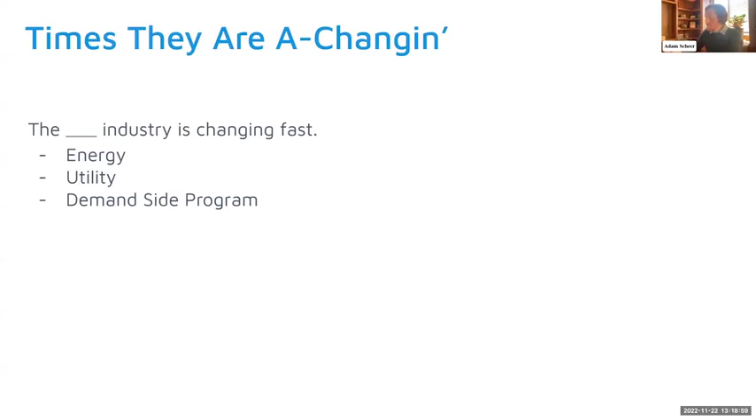Secondly, we have the opportunity where methods, advancements, and specifications can open up a new batch of use cases. Things like integrated efficiency and demand response, solar and storage. Like I said, and I think we all understand this inherently, the programs of tomorrow are not going to look like the programs of yesterday. And so, yeah, times they are changing, right? So just fill in the blank here. The industry is changing fast. The energy industry is changing fast. The utility industry is changing fast. Our industry is changing fast.

And why is it changing fast? Well, the electric grid itself is becoming the hub for broader decarbonization. It's not just decarbonizing power plants. That's not the game anymore. It's decarbonizing transportation. It's decarbonizing buildings. It's decarbonizing through the use of solar plus storage and giving the grid that much needed resilience when we have a high penetration of renewables.

So distributed energy resources in general are being utilized and integrated into the electric grid system in a way that they never were before. This obviously is creating a huge stress on the grid, and it gets back to some of my earlier statements about the need for demand side resources. So we need measurement capabilities that will enable, not inhibit, these types of modern programs and the aggregators who can bring them to bear.

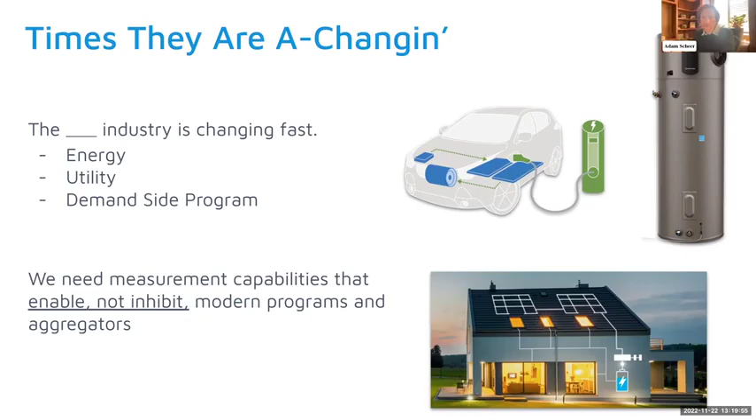Okay, let me stop there really quick and see if anybody has any comments, questions, or thoughts on what I've covered, and then I'm going to get into a quick methods review and then where we want to go at this point with some of the existing methods.

I see James. Yeah. Hi there.

Yeah, so one question, I suppose, is on whether CalTRACK is meant to calculate site level savings or portfolio level savings. It's a really good question. CalTRACK fundamentally is an individual meter model. However, it's really not designed to be that highly sophisticated, specific model for every single building out there, especially on like large commercial. So there is a lot of statistical variability in energy consumption year over year for most customers.

If you look at the residential sector as an example, the standard deviation in the difference of year over year energy consumption is almost a megawatt hour. That's like 8–10% of a typical customer's usage, even more in California. And that's just year over year energy consumption, and you can even weather normalize that, the value is about the same. We know that we have a lot of change that's happening in a typical customer's circumstances.

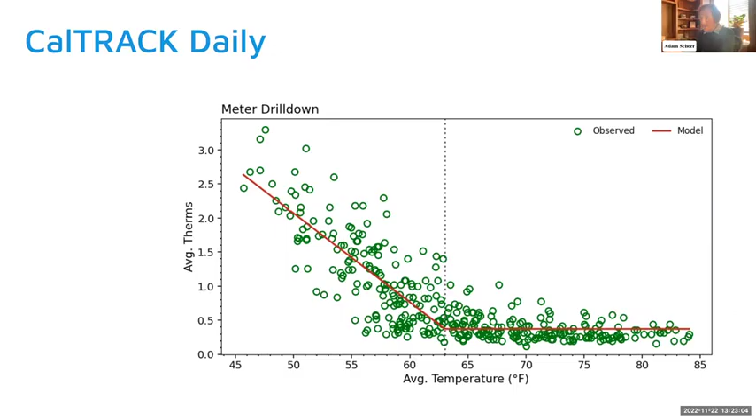So I want to start with the CalTRACK daily. The way CalTRACK daily currently works, this is just a graph that shows you how a model is overlaid on meter data. This is a good example to think about with respect to gas consumption. We have the average daily temperature on the x-axis, and on the y-axis the total therms consumption for any given day. Think of this as a meter. The model generated to fit this data has a few components, and the model is shown in the red line.

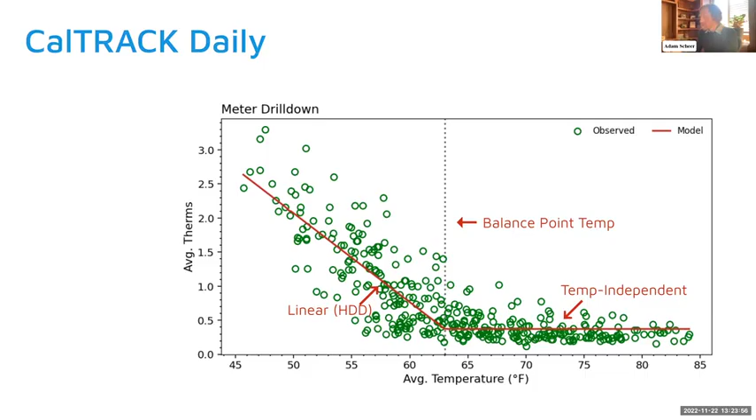First is a balance point temperature. The balance point temperature basically says where in this meter's usage do I start to see increased consumption as a function of temperature. Outside of that region is a temperature independent region. To the left of the balance point temperature, at colder temperatures, I have a linear model that we fit. So it's basically a piecewise model with a temperature independent region, a balance point temperature identified in the optimization process, and a linear region, and this HDD is a heating degree day. I'll talk more about what exactly that is. So these are the components of the CalTRACK daily model.

Now, what I showed you was an example for gas. In reality, there are 4 distinct CalTRACK models that can be fit to data, and we will fit each one and choose the best one on a meter by meter basis. These range from a completely temperature independent model all the way through to a model that has a heating balance point temperature, a cooling balance point temperature, and associated slopes. A model like that you might expect for a customer that has electric heating and electric cooling, or whose energy consumption increases in the winter as well as in the summer when the temperature gets cold and when it gets hot.

So this is fundamentally the way that the CalTRACK daily model is formulated. It's not insanely complicated, but it's not super simple either. These balance point temperatures are variable, and they're determined via an exhaustive grid search. Every single degree is tested to find out if putting the balance point temperature there, in the linear regression that follows, is the best possible point to fit the data on hand. We'll talk more about opportunities to simplify the grid search functionality, which is computationally very expensive.

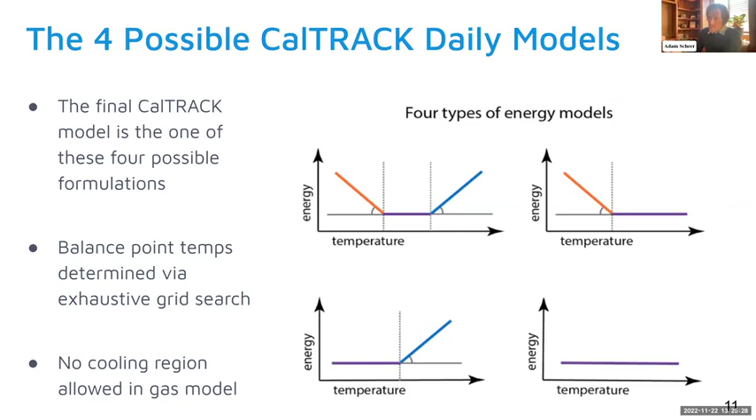Okay, now the hourly model. I'm not going to dive super deep on the hourly model. There's much more that goes on in the hourly model. For those of you who are familiar with the terminology, it's a time of week and temperature model, meaning that the model parameters or the variables are the hour of week and the outdoor temperature. It's a piecewise linear model, so there are a number of temperature bins for which data are fit independently. And so in addition to those aspects of the model, there's also an occupancy parameter, and there's this building state.

So seasonality in the CalTRACK hourly model is captured. It's not really captured in the daily model. I'm going to talk a lot more about that. But seasonality is captured by producing independent models for each month. So every single month gets an independent CalTRACK hourly model. So the time of week aspect of the model is for specific timeframes that each month is utilizing to develop a distinct model. And then all of those models are basically sutured together for the annual CalTRACK hourly model.

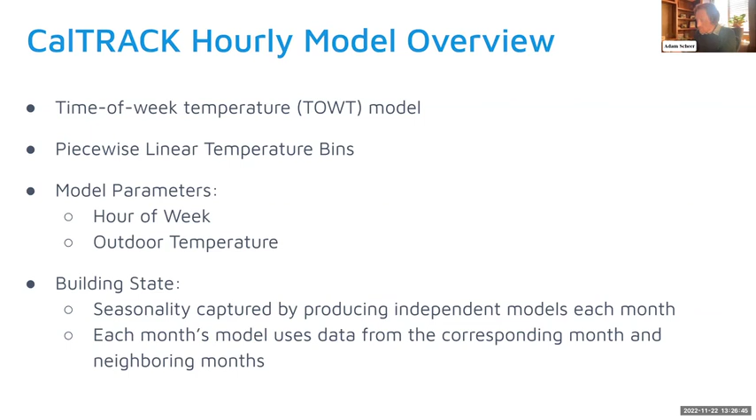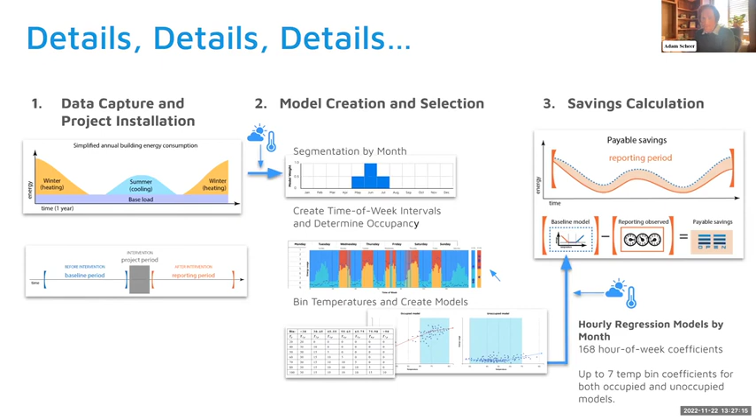So there's a lot of details that go into this. And in particular with the occupancy detection or the building state, there's an initial regression that's done. There's a lot of details around how the temperature bins are determined and what data sufficiency needs are for each of those temperature bins to avoid poorly fit models or overfit models. So there's quite a bit, and there's a lot of documentation. We have a lot of links in this deck that will point people to deep dives on any of these things if you want to look that far.

So once you have a baseline model, and that baseline model is developed on a 365-day pre-program period or pre-intervention period, then you can produce a counterfactual. And that counterfactual uses the model parameters that were optimized during the baseline period in order to predict the energy consumption in the reporting period or in the post-program intervention timeframe. And the way this is done, if you think about the daily model, the temperature is the variable in the daily model. So you take the temperature data of the reporting period and you plug it into the baseline model parameters, and that gives you a prediction of what energy would have been consumed in the absence of the program. And that is called the counterfactual.

So the difference between the actual observed consumption and the counterfactual is the savings. That's the savings in the CalTRACK model. It's not crazy complicated, really, but it's good to go over this because that counterfactual is everything. Having reasonable counterfactuals is really what makes a model a good model or a poor model.

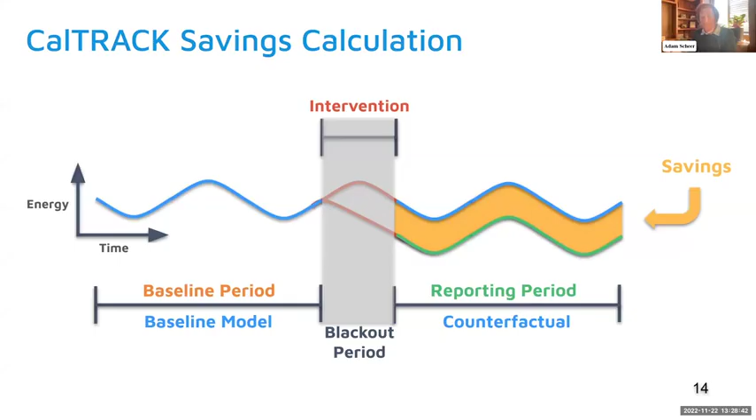Okay, so I think I'm going to go through this section, then I'll stop for questions. And then Travis Sykes, who is a lead data scientist at Recurve, is going to take the baton and talk a little bit about addressing some of the issues that we would like to bring to the forefront here today. So CalTRACK Daily, let's start with CalTRACK Daily. We know that there are specific areas of model bias. And the question we have is, can we improve the known biases in the CalTRACK Daily model? And I'll talk more about where we know these biases are.

So secondly, are computational and efficiency gains achievable? I think it goes without saying that in large portfolios, we need to have a model that can scale. We need a model that doesn't take 20 minutes to formulate and run. We need parallelization. We need these models to be able to operate on portfolios of millions of meters potentially. So computational efficiency gains would be a very welcome thing.

And potentially improve modeling for solar PV customers. This is an aspect that we're all grappling with now. More customers have solar, and we'd like to be able to include them in programs. In fact, they would be very worthy of prioritizing in our programs. They have solar. They're likely to be customers that have something to offer the grid.

CalTRACK hourly. So there are a number of known, very small bugs, and it would be good to just fix those, to knock those out. We'd also like to specify demand response baselines and appropriate model modifications. This whole hourly CalTRACK model that I talked about earlier, suturing together a lot of monthly models, doesn't necessarily lend itself immediately to the demand response use case. So we've made some progress on this already, working with the California Independent System Operator. And we'd like to bring some of those findings to this group and talk about how DR baselines can be established within the CalTRACK framework.

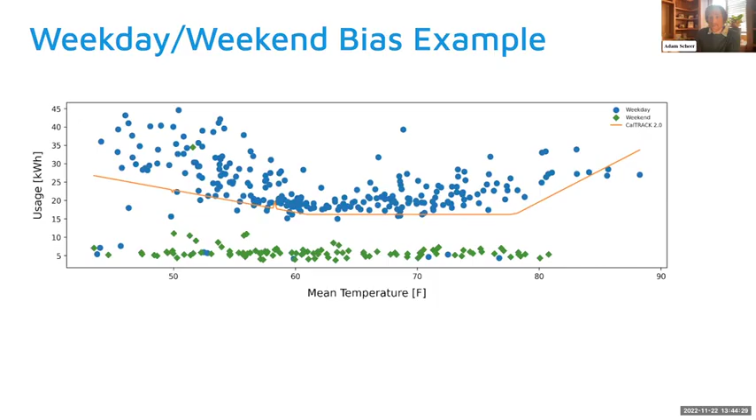Okay, seasonal bias. I'm going to spend a little time talking about seasonal bias because I think it is quite important, and you could ask yourself, why is there seasonal bias? It's one thing to know that there is seasonal bias. It's another thing to really figure out why it is there. And I'm going to try to explain why seasonal bias exists in the CalTRACK daily model. So feel free to ask questions if I'm losing folks, but I'm going to do my best to explain this as clearly as I can.

So first and foremost, I just want to explain this graph. The x-axis is the average daily temperature minus the heating balance point, and we're looking at aggregated data. The reason we're using this metric on the x-axis of average temperature minus heating balance point is it allows us to put everybody on the same apples to apples basis.

If I were just using temperature on the x-axis, well, some people have a heating balance point of 40. Some people have a heating balance point of 55. Some people have a heating balance point of 75. It changes for everybody. So if I'm looking just at temperature and I'm looking at bias as a function of temperature, then I'm mixing all of these different customers together in a way that doesn't actually highlight the problem.

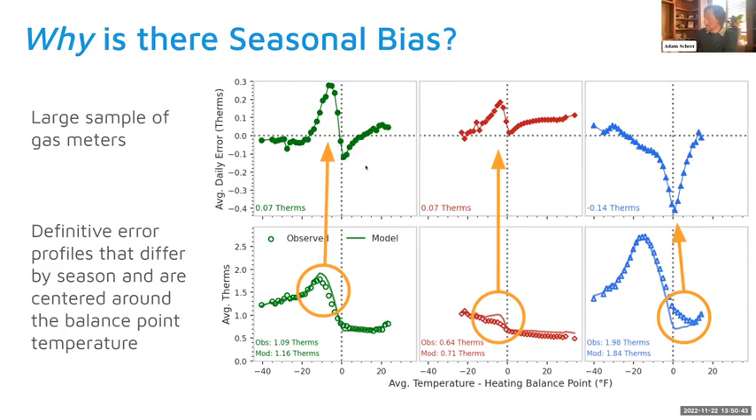Okay, that's a mouthful. I'm going to just get through the seasonal bias discussion, and then I'll stop and see if there are any immediate questions. So I've kind of explained this. I probably should have used the animations that I generated.

But it winds up coming back to about zero, which, like I keep saying, if you have an annual model, your bias around the year is going to end up around zero.

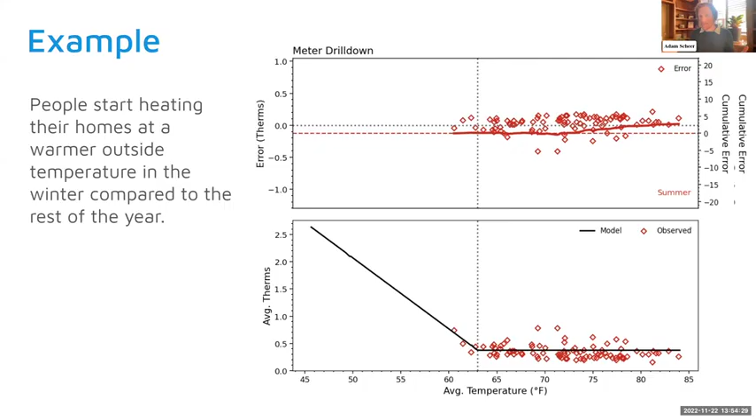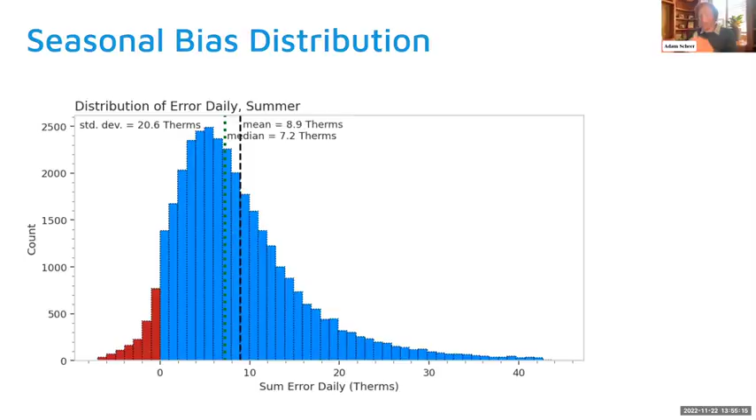It's pretty obvious, I don't need to explain this a lot. It's pretty clear that this is a pretty systematic effect. It is there for most customers. When I look at the summer, it's very different, but it is also there for most customers. And I can show the shoulder; the shoulder looks a lot like this too. So this is why there is seasonal bias in the CalTRACK daily model. Let me stop there and just see for a couple minutes, and then I want to move us on, if there are any thoughts about this.

Yeah, this is Steve again. I think we've seen this for all the homes we've analyzed, and we see that getting the balance point temperature correct is very, very difficult for many, many homes, and it changes throughout the year. So those two things are critical. So I would say that improving the method used to select the balance point temperature in CalTRACK is a key goal. Thanks, Steve. Totally agree.

All right, I'm going to move us on. This is just an interesting side note, which is we've also done this analysis for the CalTRACK hourly model, and there is a bias pattern, but seasonal bias itself tends to not exist. So if I'm looking at these numbers in the lower left-hand corner of these plots, I see that for the average customer, the average daily error is about 0.14 therms negative in the winter, and then 0.07 therms positive in both the summer and in the shoulder period.

But in the hourly model, that bias doesn't really exist across the season. But there is a pattern, interestingly enough, because the hourly model doesn't really have a balance point temperature, but I'm still plotting it against these balance point temperatures that were determined in the daily model. So there is a pattern here, which is very intriguing and something that we anticipate coming back to when we're focused on the hourly model.

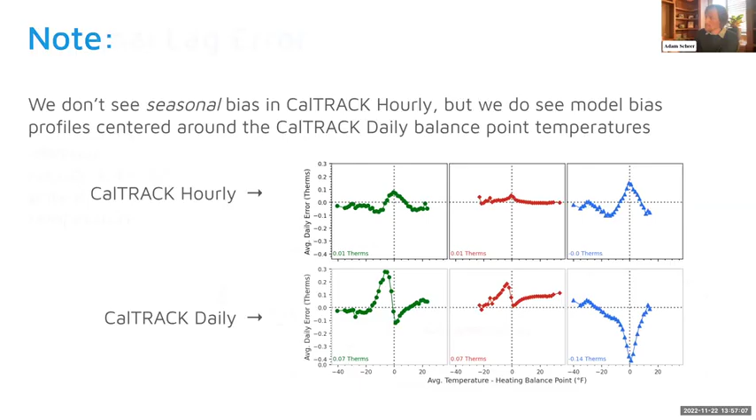Okay, so I'm going to hand the baton to Travis. But before I do, yeah, Ethan, go right ahead. Well, sorry, on that last slide, I just wanted to double check and make sure that I heard you correctly on the sign, right? Because that far right-hand graph is the winter data, right? That's the most. Oh, yeah. Thank you, Ethan. That's the strongest one.

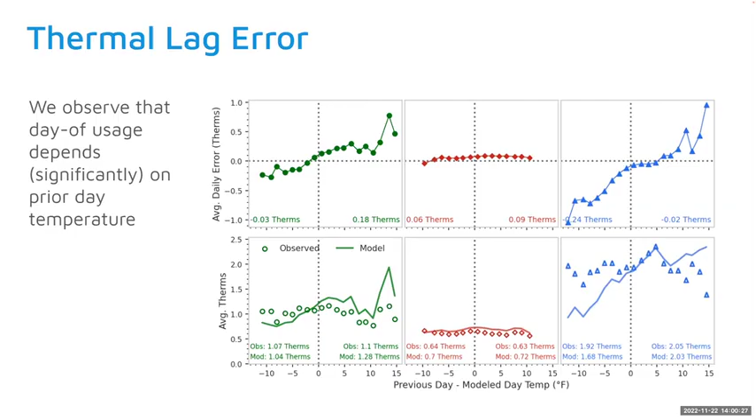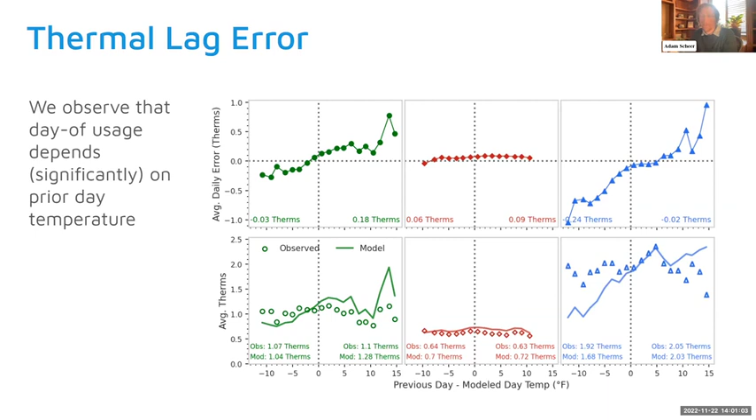So I promise that Greg is not a plant, but Greg, that is exactly what I want to hand the baton to Travis to discuss, actually. So just by way of introduction, Travis has been at Recurve about a year now, and he is a senior data scientist here. He comes to us from the world of chemical kinetics, which actually is the world that I came from before I was in the energy industry. He specializes in numerical methods, model development, statistics, and has done some really good work here on comparison groups, and is now diving into a framework for how we might get at some of these issues. So Travis, I will go ahead and move through the slides if that's okay, unless you really want to grab the screen. Just let me know.

Oh, before I do that, I have one last slide, and it is just to say that all of these things are testable, and I think we're already showing that we can identify bias, we can wrap our heads around these things, we can quantify these things. What ultimately should guide our thinking and our decision making? There are a number of things that I've put here, but these are kind of our thinking through what is an ideal case.

An ideal case is a model that doesn't have significant sources of bias, a model that produces low uncertainty, a model that is predictive, a model that is not prone to large degrees of overfitting, a model that is simple instead of complex, a model that is interpretable, and a model, finally, that can be run with low computational expense. I think, obviously, some of these things are in some conflict with each other.

So we're going to have to make some decisions about whether, for instance, some degree of increased complexity is something that we want to take on at the expense of greater computational expense and potentially a higher degree of overfitting, and maybe a little less interpretability.

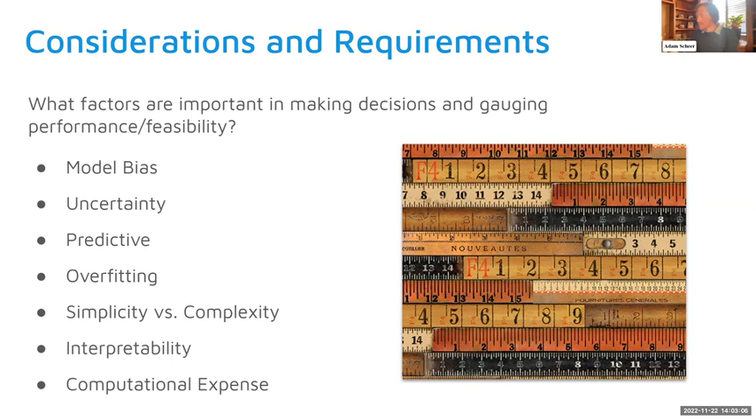So let me hand the baton to Travis. Travis, take it away. Let's address Greg's question and some of what we've been thinking about here.

All right, so this is a characterization of what you can kind of expect, and this might seem extreme, but we actually see real world meters that look not unlike this in some cases. So here, what I show is energy usage on the y-axis and temperature on the x-axis, where temperature is increasing to the right. So on the left side in purple is winter. The shoulder months, spring and fall combined together, are the green, and then summer are in blue.

And what we would currently get if we ran CalTRACK 2.0 would be a model that tries to slice through the middle of all of that. So you end up under-predicting winter, over-predicting shoulder, and yet again under-predicting summer. All in all, if you run this for the entire year and you aggregate all of that together, you're going to see the exact same effects that you would expect as what Adam just showed.

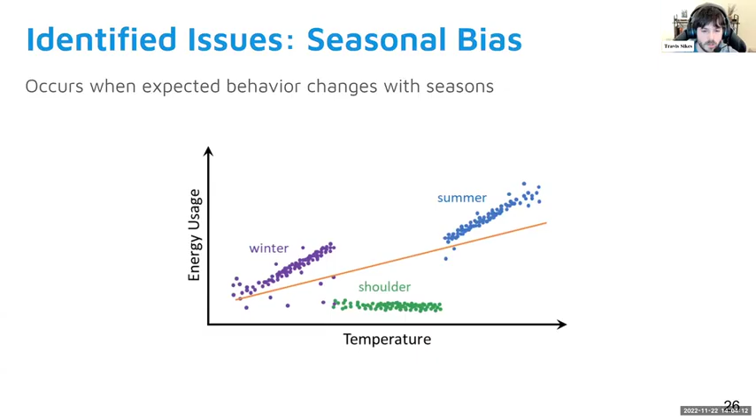So what we are considering doing instead, if you can move to the next slide, is to keep the same models, but split by seasons, and then fit the models based upon those splits. For example, the better choice here would be to split winter up to its own model, and in the next year, anything that is designated as winter would follow this model. Anything in the shoulder would follow this nearly temperature independent model, and the same for summer.

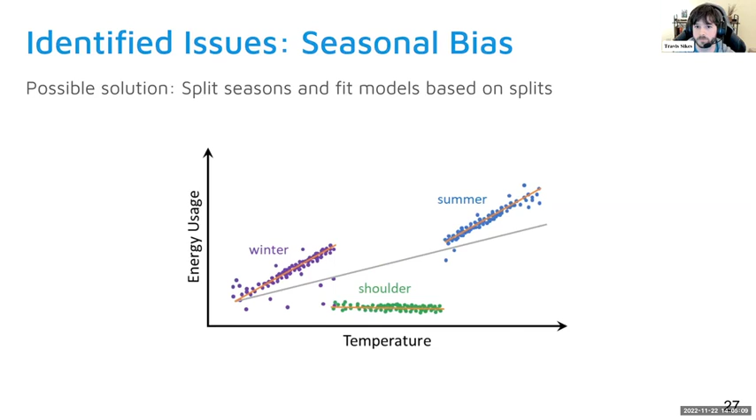The complication here is really one of not wanting to make things more complex than they need to be, but I'll get to that in a little bit. So let's just go ahead and jump to the next one. Or actually, better yet, are there any questions over the proposed solution for seasonal bias? All right, I'll move on.

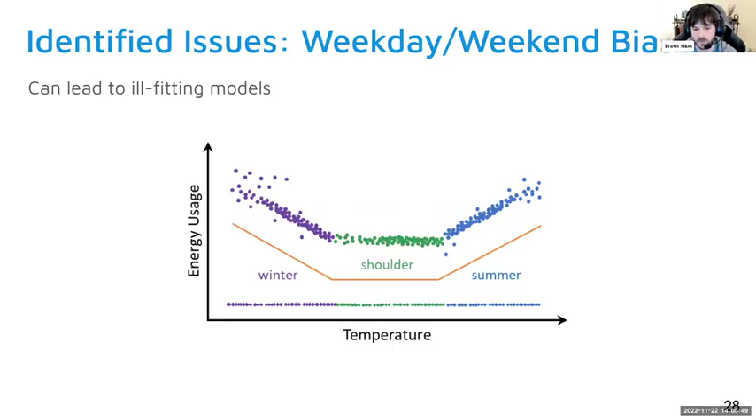Now, if we use the same solution as we did with the seasons, next slide, then you can basically say, okay, we're going to keep all of the seasons together, except we're going to break apart the days based upon weekday and weekend. And if we do that, you end up with your characteristic heating degree day, temperature independent region, and cooling degree day on the upper plot, which represents all of the weekdays.

And then on the bottom plot, this business or house basically just shuts down during the weekend. So their energy usage drops to practically nothing, and it doesn't really have much of a connection with the temperature at all. So it's temperature independent as well. But it could have its own unique model if it has any sort of temperature dependency.

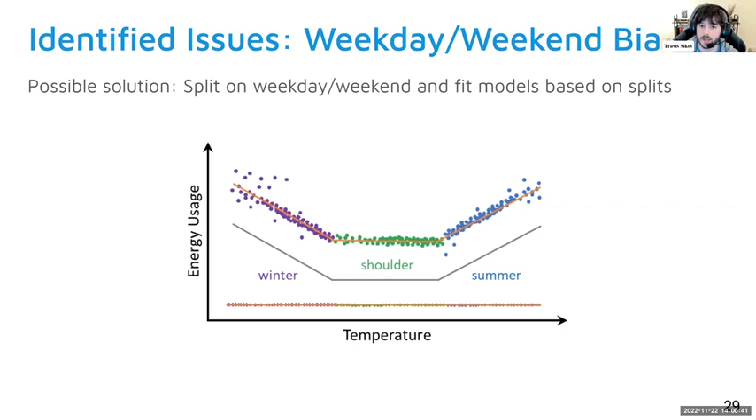So I mentioned overfitting, and this becomes a serious problem at this point, because it's not just about combining these things together. We as people are very good at picking out patterns. It's hard to teach the computer to do the same thing in an intelligent way.

So one way that we can approach this is to basically isolate the correct complexity through a model selection criteria. This is something that's already done if you think about the different kinds of models that Adam was showing at the start, where you can eliminate cooling degree day from some models, you can eliminate the heating degree day from some models. And the way that we choose this is by penalizing our residuals based upon the number of coefficients with the degrees of freedom.

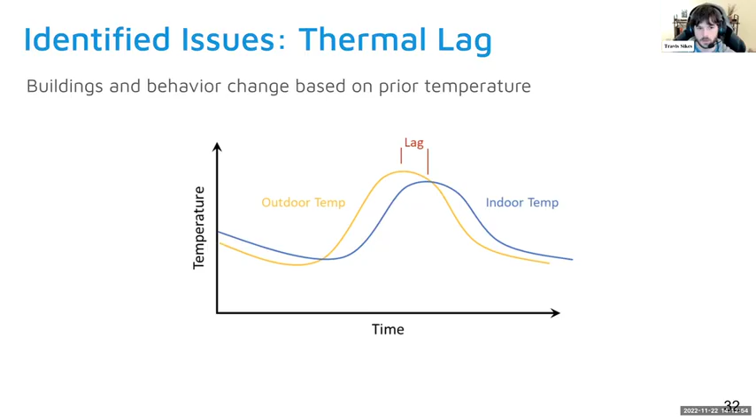So it's going to take some time before that happens. And then why that matters is because that is also going to correspond to the AC needing to turn up in order to shed some of that heat. So there's this lag time between the outdoor temperature and the indoor temperature. And if you can go to the next slide.

Now, what we could do is lag the day's temperature by some amount, because a building, unless it has some sort of an intervention, is going to have the same amount of insulation. It's largely going to behave the same way throughout the year. I'm kind of neglecting the behavior component here. It is important. We're just crossing our fingers and hoping that it fits in with this.

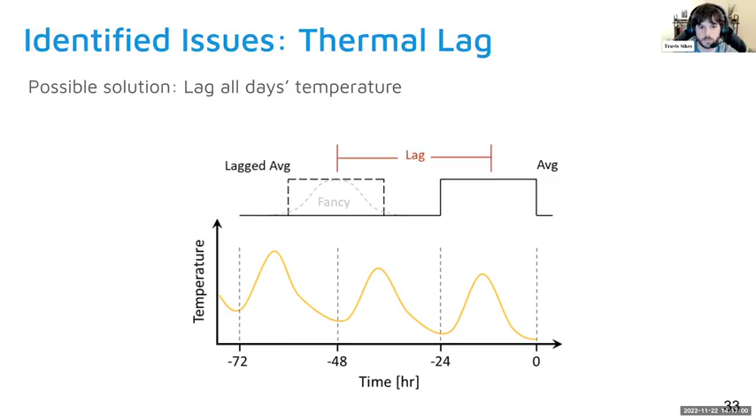All right, we can move on. Oh, Steve? Yeah, I've written about this in CalTRACK before, but what we found, at least for homes, was using a rolling average worked great. More and more buildings are doing pre-cooling and preheating, so it's not just a thermal lag. There's also the opposite, where the energy use precedes the temperature change. We decided on a 5-day rolling average for both the HDDs and the energy use, and that seems to work really well. All right, I think that's a pretty good idea, and we'll add that to the list. Thanks, Steve.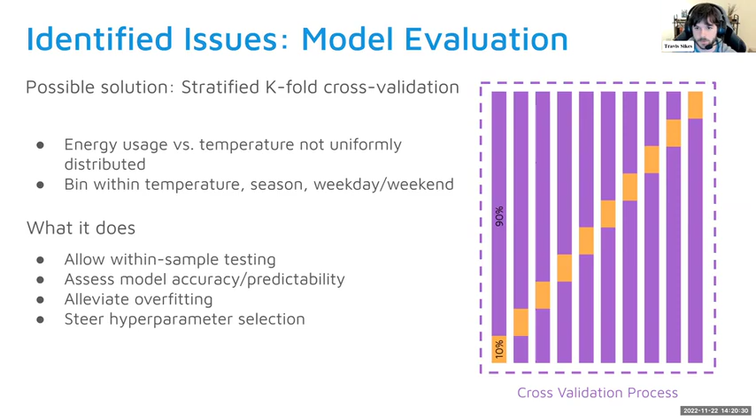This would also allow us, as I mentioned, to assess the model accuracy and predictability. It'll help to alleviate overfitting, because if we're overfitting, we won't see the same positive predictability that we would otherwise. And this will also help steer us in model selection, hyperparameter selection, that sort of thing. We can jump to the next slide.

Now, there's a whole bunch of questions that I thought people might have, so I went ahead and addressed some of them. Everything that I just discussed sounds a whole lot more complicated than what we're doing. Yes, you're right. How do we make sure that instead of taking the 30 seconds that it takes to fit a model now, it doesn't jump up to 3 minutes or 10 minutes, because that's going to make all of this methodology a complete waste of time.

Well, instead of doing this exhaustive grid search, we can switch to a global optimization scheme, and we will find that we get major computational efficiency increases. So, next question. Why would we want the old model at all? Because you might notice that I didn't talk anything about doing a multiple linear regression or standard approaches from a data science perspective.

And the reason for that is that we think the cooling and heating degree days are extremely useful for disaggregation. This allows us to have some estimate of, can you install an AC unit and see some sort of benefit in the south. So we want to preserve that, which means that I'm constrained to needing a model that still preserves having heating and cooling degree days.

What we might do, though, is look at adding some changes to the functional form. I don't think Adam showed it in the plots, but I found cases where the change from temperature independent to cooling degree day or heating degree day is definitely not just an on-off switch that you get by doing the piecewise linear combinations.

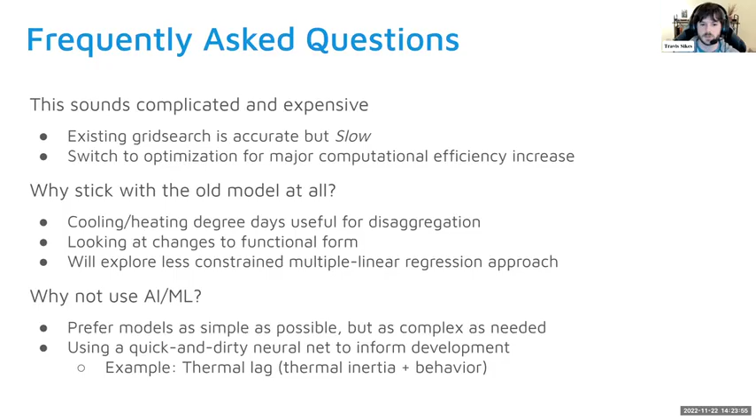Great. Just a really quick note on comparison groups. Comparison groups are still important because they help remove model bias, and model bias can come in a few forms that are important. One form being external factors like global pandemics, economic recessions, inflation pressures, things like that. And we're not going to be adding a global pandemic variable to CalTRACK anytime soon. I hope folks are on the same page as we are with respect to that kind of thing.

But we don't want to rely on comparison groups to alleviate things like seasonal bias. They do alleviate seasonal bias, but we don't want to rely on them as much for those purposes. So it's just to say comparison groups are still important, but they're not going to be part of what we're focused on here. And Phil, we have a little bit of time.

I still have a couple slides on the technical steering committee, and I have a slide or two on how to contribute. And we have a little bit to get through on GitHub. What I would suggest is this is being recorded, so anybody who has to jump can jump. But let's stick with this and finish this out. This is a heavily packed first meeting, but we're trying to get a lot out there. And the GitHub stuff, I don't want to shortchange the GitHub stuff. So if you have to hop, feel free to hop. But let's keep on track here. And Phil, why don't you take the baton?